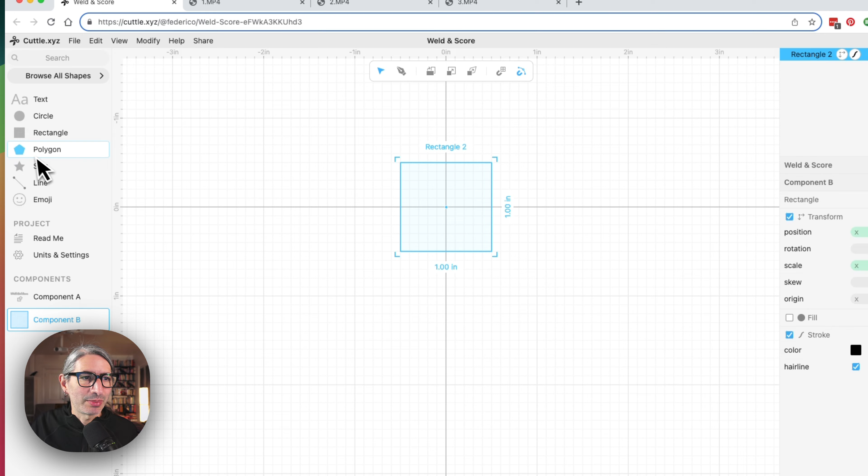So let me grab a blank canvas right here. So I'm going to explain the weld part of the Weld and Score first. So as an example, I'm going to grab a rectangle and a polygon, and I'm going to select those both, and I'm going to apply the Weld Modifier, also known as Boolean Union. So you might be familiar with that one.

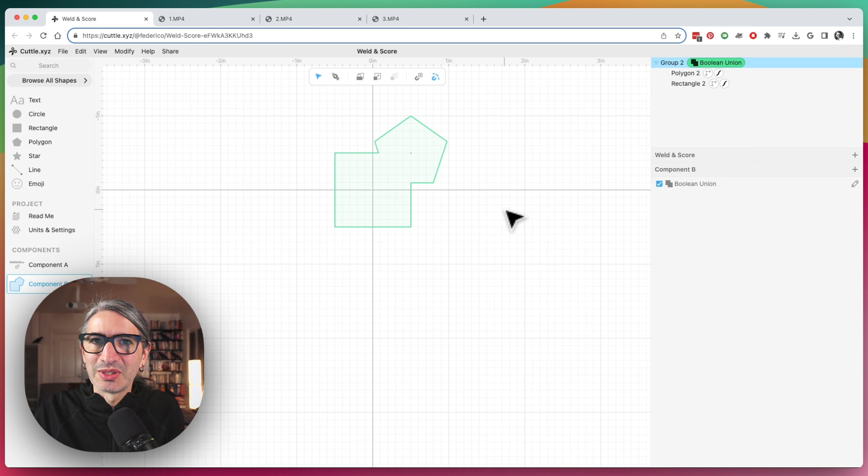So when I apply that, what happens is that both shapes get kind of joined together or welded. So they turn into a single shape with a single outline that I can cut as a single piece. So this is a very useful way of creating more complex shapes based on simpler ones.

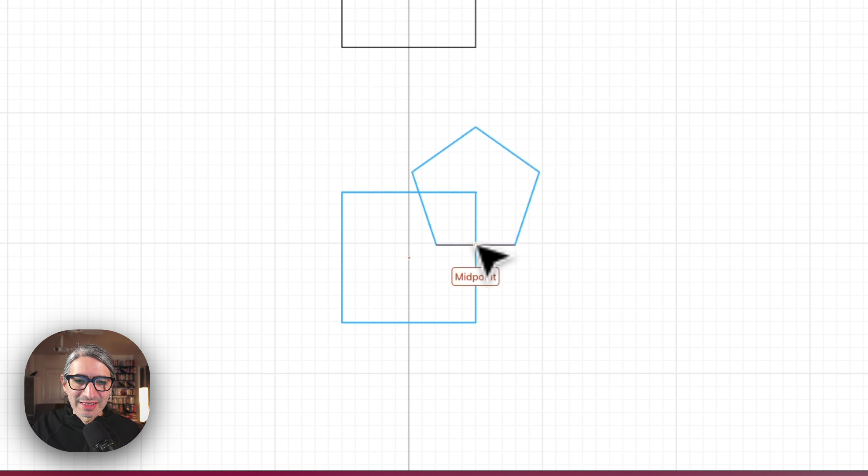Now let's apply the Weld and Score to the same two shapes. I'm going to grab the rectangle and the polygon, and now I'm going to select them both, and I'm going to apply the Weld and Score, which is here towards the bottom. And the results are going to be relatively similar, with the difference that now the line of the polygon that is overlapping here is in blue.

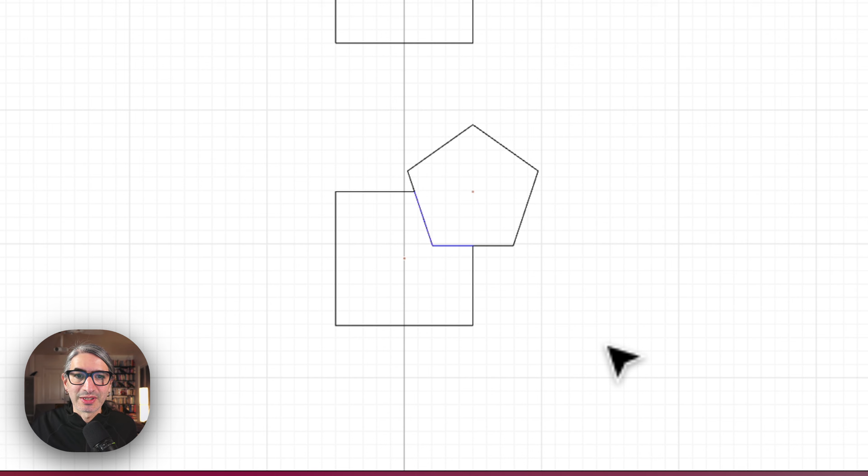So what I got here is that both shapes got welded, but the shape that was on top, or the second one that I put on the canvas, gets its outline where the other shape was overlapping. And so what I can do with this is cut the black line here, and score the blue one. And a score in general is when you apply less power on your laser. So instead of cutting all the way through the material, you end up kind of highlighting the line, kind of burning it in.

So I actually went ahead and cut this example, just to show you. So as you can see, I have the shape. It was a single outline. If I look at the back, I can see it's a single one. But then I get this line that highlights that polygon. And so that's just the very simple example with two shapes.

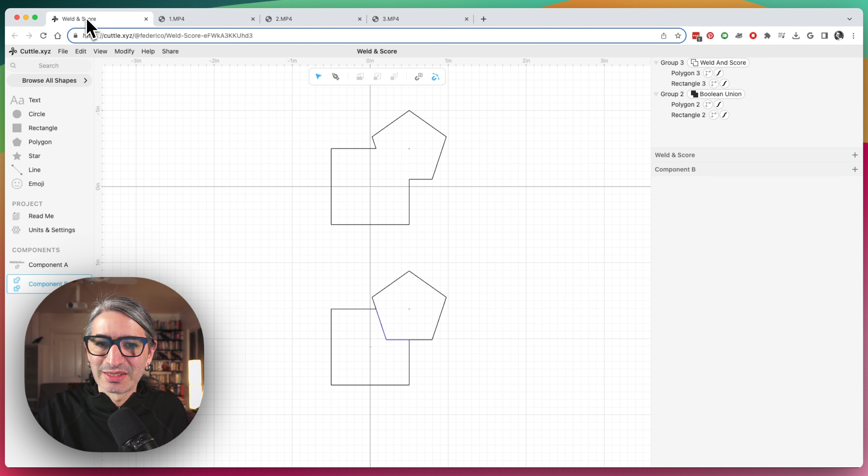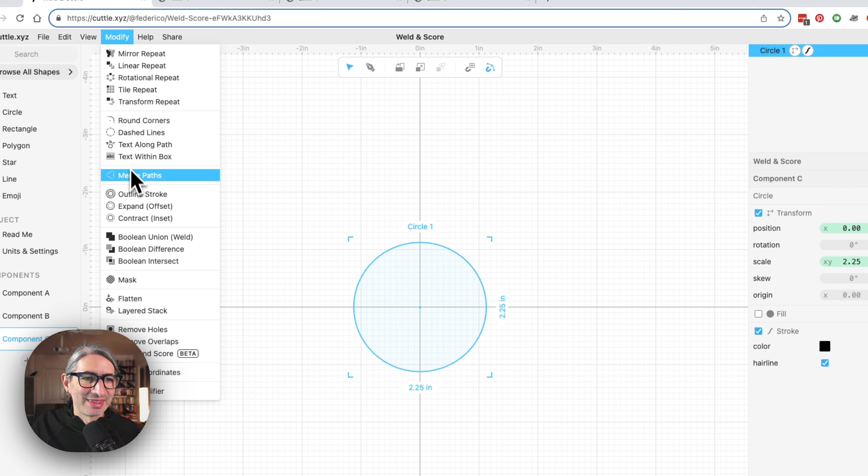And this becomes really useful when you use it with text. So let's make an example that has text. So I'm going to do something quick. I'm going to grab a circle. I'm going to make it about 2¼ inches in diameter. I'm going to show you another modifier here called the outline stroke. That's kind of useful for when you want to make a ring. I'm going to make it about 1/4 inch.

So far I just have a ring, but then I'm going to grab some text. So I'm going to use the connected text. I'm going to place it right here. I'm going to change the alignment to center, and I'm going to change the vertical alignment to middle. And then I'm going to betray the fact that I live in California by writing the word awesome.

And I'm just going to size it so it kind of fits there in the circle. So let's put it up a little bit. So here is the idea. I want to weld the letters to the ring on the outside. Let's make it a little smaller. So I want to weld the letters, but I don't want to lose some of them if I weld them all together.

So let's weld them to see what happens. So if I just apply the Boolean Union, you'll see that the A and the E kind of disappear. And that's not great. So I'm going to delete that Boolean Union, and instead I'm going to apply the Weld and Score. So I'm going to select it, go to Modify, and apply Weld and Score.

So as you can see here, I get a similar result. I get the letters welded to the ring, but then in blue, I get the outline of those letters that otherwise would have disappeared. So let me show you. I actually went ahead and cut it. So as you can see, I scored just that blue section.

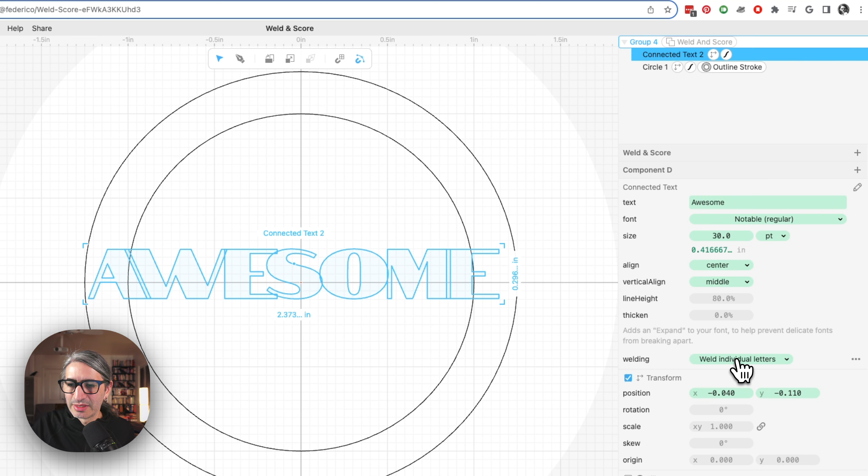And so what that one does now with the Weld and Score applied is that the individual letters get that additional blue line that I can use as a score. And so the A doesn't get lost. So we get that with the other one. But now the A and the W also give me that additional line here. And look at the connection between the S and the O and the M, and of course the M and the E. So that option right here for welding individual letters is useful for when you are not using script fonts.

And I went ahead and made a version of this one. I should have thickened the font perhaps. But as you can see, it's readable. And the A and the W are nicely separated. I have a single piece. And I get that line there, and I get the line and the E.

So these are just a couple of examples on how you can use the Weld and Score modifier. I hope you think they're awesome and you can incorporate them in your laser cutting workflow.